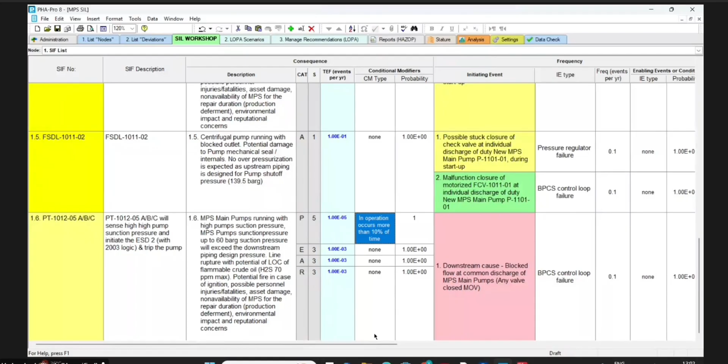This is correct. We have taken 5, and we have gone for occupancy level more than 10%. With this, the rating is coming to SIL 3, and that is what is expected. And this is correct.

It is basically high SIL 2. It is high SIL 2 or low SIL 3, yeah. It's a 1,000. SIL 2 or SIL 3? Yeah, that's what I'm saying, high SIL 2 or low SIL 3. Yeah, high SIL 2 and low SIL 3.

So probably in the SIL verification, if you wish, we can verify with respect to the RRF. RRF is the 1,000. 1,000 may be SIL 2 or 1,000 may be SIL 3. That is okay, no issue. Yeah, but if it is SIL 3, then do we have to do something?

No, we have to do, after verification, we have to do something, like once Ananta sir, like what we have to then do it should be SIL 2. No, it is okay, it is okay. So right now what Ananta is saying is about hardware and anything. This is the extreme SIL 2 and the extreme high SIL 2, extreme low SIL 3.

This is 1,000, this is 1,000. So we can justify during the SIL verification, and we can fine tune the RRF to less than 1,000 to purely qualify into SIL 2. I will put it here.

The RRF is right now we cannot do anything to make it SIL 2. No, we can do, but what Ananta is saying is that if I take SIL 2 here, SIL 2 here, then we can take it. But Ananta is saying let us not consider SIL 2 because anyway we are going to upgrade to SIL 2. But for assessment point of view, our system, everything is designed for SIL 2. Then let us keep it.

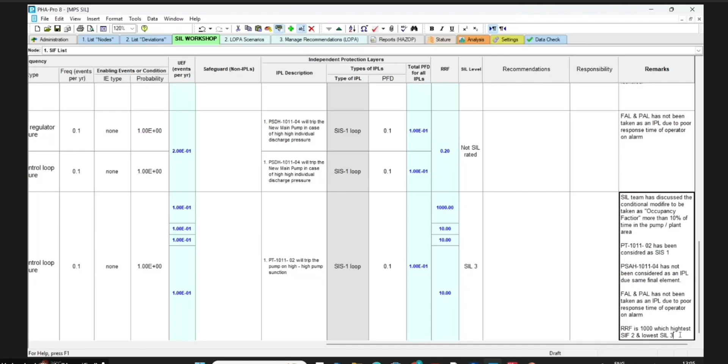This is okay, this is also SIL 2 only. See, the low, high SIL 2 is coming. No, it is okay, RRF with 1,000, which is basically low SIL 3. Yes, here we are providing 2 out of 3 transmitters here, which will easily qualify SIL 3. No issue with that. Yes, correct.

Absolutely. So guys, with this we have seen all our scope for the day. Tomorrow morning I am there with you at the MP one office.

More, which one were you saying is left for Habshan area? Anything left? Habshan, we finished now. No, only this two. Nothing more, yeah, it's finished now.

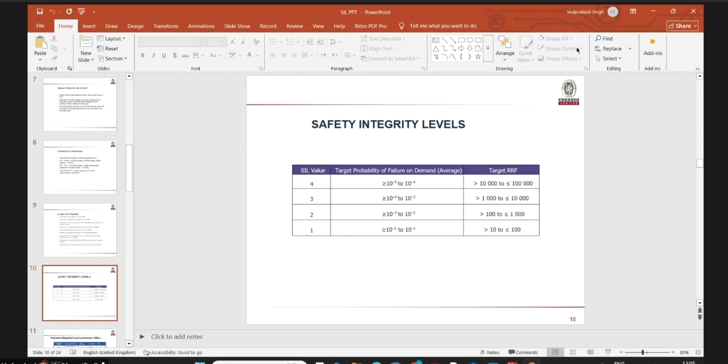Okay, we can review the worksheet. Quick review.

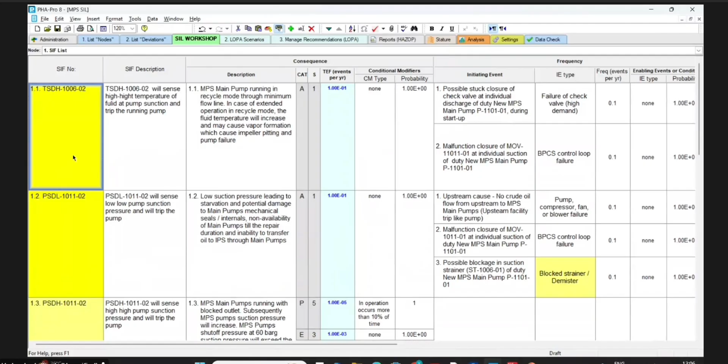Worksheet? The worksheet, yeah, quick review. In the worksheet, we have taken TSDH at pump suction temperature high, PSDL at low pump suction, PSDH at high pump suction pressure, and PSDH at pump discharge high pressure, and FSDL at low flow at minimum circulation line, and this PSDH

at common suction pressure high. Common suction high, how many? Yeah, 6. 6. What is the number?